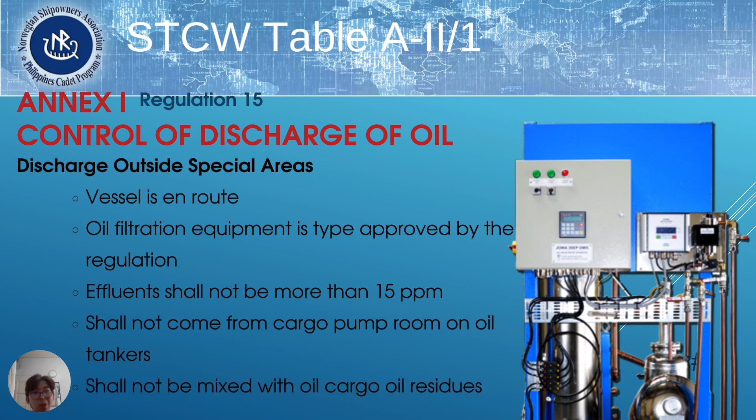And for the last one, no mixing with cargo oil. Water mixed with cargo oil, the oil being transported, cannot be discharged into the sea because it is contaminated by oil. So it has a mix of oil. If you discharge that into the sea, the tendency is it will end up in our ocean.

So next, control of discharge of oil. When discharging inside a special area, it shall comply with the regulations stated above, and there is no discharge of oil in the Antarctic.

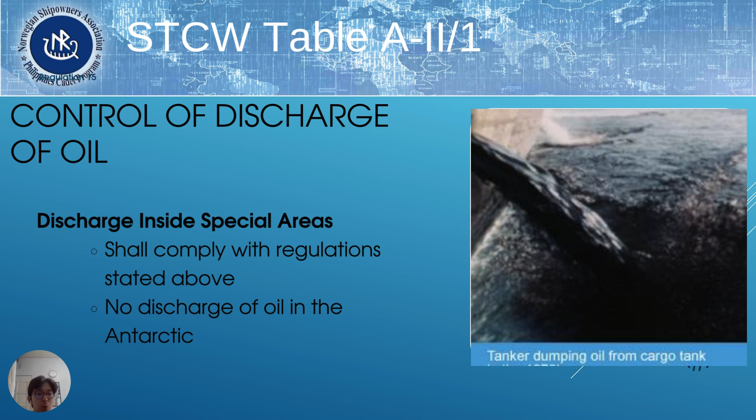And segregation of oil and water ballast. Forepeak tanks, meaning the forward peak tank, which is the forward part tank. For ships delivered after December 31, 1979, no ballast tank shall be carried out on the fuel tank. And if they need to carry large quantities of fuel stored in the ballast tank, it shall be discharged to shore facilities, as I've said.

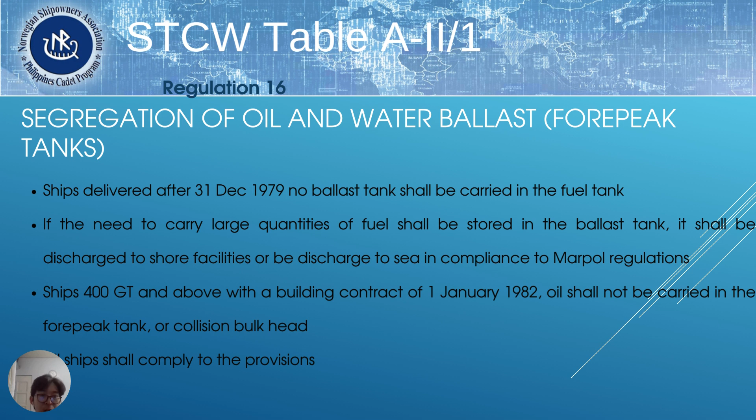Discharge to the sea must comply with the MARPOL regulation. Ships of 400 gross tonnage and above, which is the size of the ship we are referring to, with a building contract from January 1st, 1982, shall not carry oil in the forepeak tank or collision bulkhead. So all ships shall comply with these provisions.

So what are these ballast tanks that we call, and why are ballast tanks taken in the tank? Why do we need the ballast tank? Let's assume that the vessel does not have a ballast system. In such cases, certain conditions may arise. So what is a ballast tank, really?

Ballast tank is a compartment within a ship, inside the vessel, that holds water. Ships use these ballast tanks to take or release water. That's why we call it ballast, because we release and also take in water.

So the ballast tank helps maintain the stability of the vessel and proper draft. The draft is the line at the bottom near the keel, and the depth at which the ship sits on the water, that is the draft.

When a ship is not carrying cargo or needs to adjust the weight, it can fill the ballast tank with water to stay steady. When a ship is loaded with cargo or needs to reduce the weight, it can pump out the water. For example, if your vessel has no cargo but you're going to cross the Atlantic, we know that when the ship is empty, it moves around more.

So in order for a vessel to stand steady on the high seas when crossing the Atlantic, we need to fill the ballast tank with water. That's where we use the ballast tank.

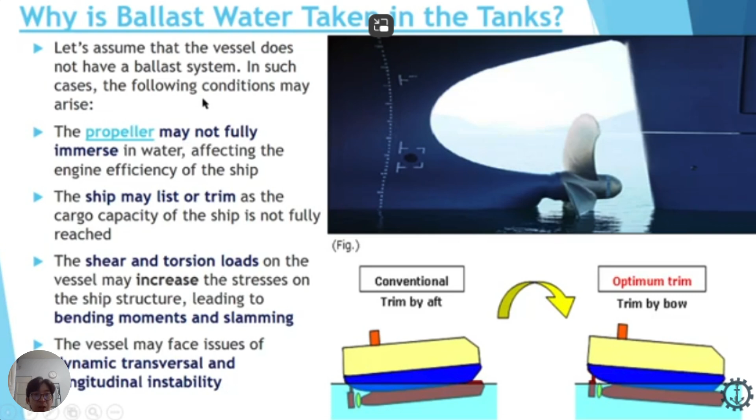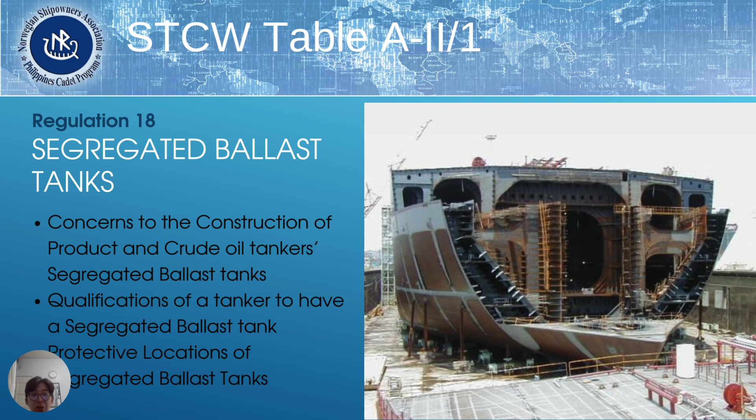And we have also the segregated ballast tank. Its main concern is to the construction of product or crude oil tankers. Segregated ballast tanks qualify a tanker to have protective locations of the segregated ballast tank. So ano ba ang segregated ballast tanks?

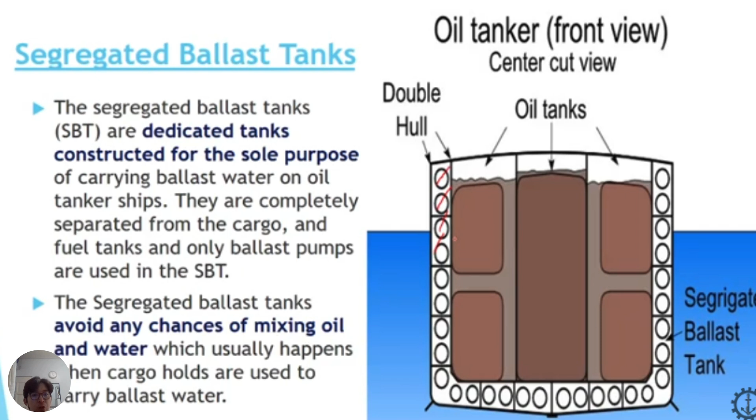Ginagamit natin siya to balance the cargo. So the tanks avoid any chances of mixing of oil and water, which usually happens when cargo holds are used to carry ballast water.

And also, segregated ballast tanks are special ballast tanks on a ship that are only used for holding water or ballast to help balance the ship. These tanks are separated from the parts of the ship where oil or cargo is stored. Nakahiwalay po siya. This is important because it ensures that the water in the ballast tanks never gets mixed with the oil or other cargo.

Kaya from the word itself, segregated. So when the ship releases the water back into the sea, it won't cause pollution since it's just clean. This is especially important for oil tankers to help protect the oceans from oil spill. So that is the purpose of our segregated ballast tanks.

So with regards sa regulation natin, need of the SBT, no? SBT na lang para mas mabilis. Crude carriers of 20,000 tons deadweight and above, product carriers of 30,000 tons deadweight, need capacity of SBTs to operate ballast tanks without having cargo tanks carry the water.

So when weather conditions are so severe that additional water ballast is required to be carried in cargo oil tanks, so in addition, circumstances account for the particular nature of the operation.

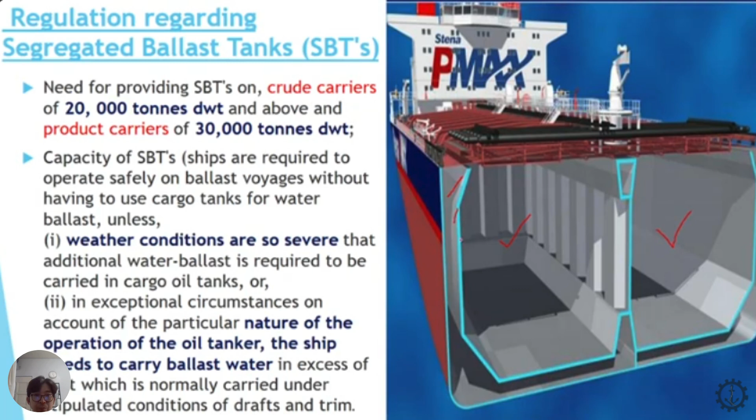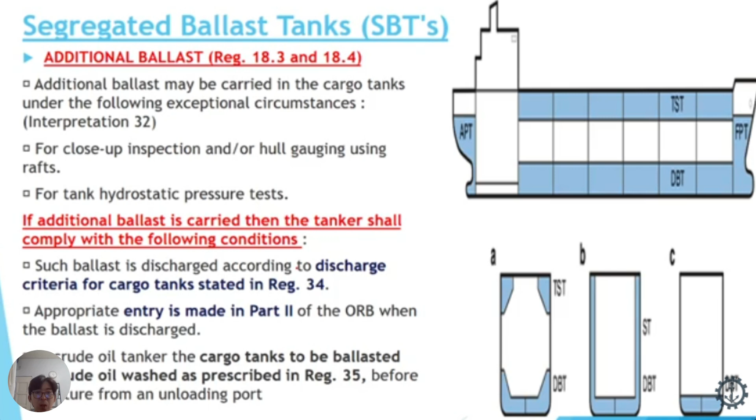So appropriate entry is made in part 2 of the Oil Record Book, ORB, when the ballast is discharged, and crude oil tankers' cargo should be ballasted or crude oil washed as prescribed in Regulation 35 before departure from the unloading port.

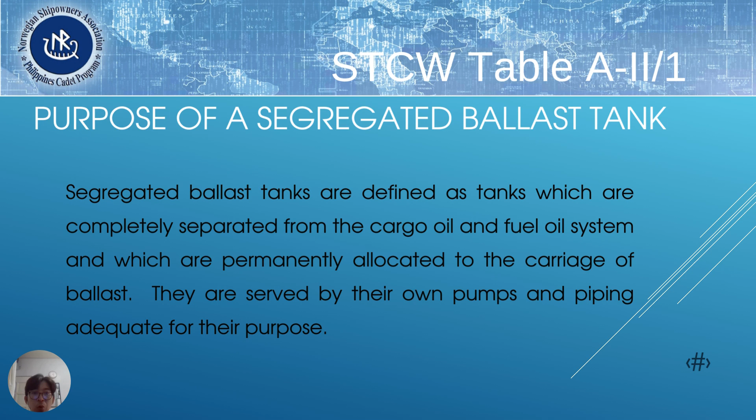So again, the purpose of this is to define as in which we are completely separated from cargo oil and fuel oil. So this system is permanently allocated to the carriage of ballast, and they are also served by the use of own pumps and piping adequate for their purpose.

So kung meron tayong segregated ballast tanks, meron din tayong double hull and double bottom requirements. Pag sinabi nating double hull, ayan yung ayan, tingnan niyo sa picture. Pag sinabing double hull, yung pinaka pader niya, doble. Pag sinabi naman double bottom, yung pinakailalim niya, doble. So before, yung mga construction na vessel, hindi double hull yung mga kinoconstruct na vessel.

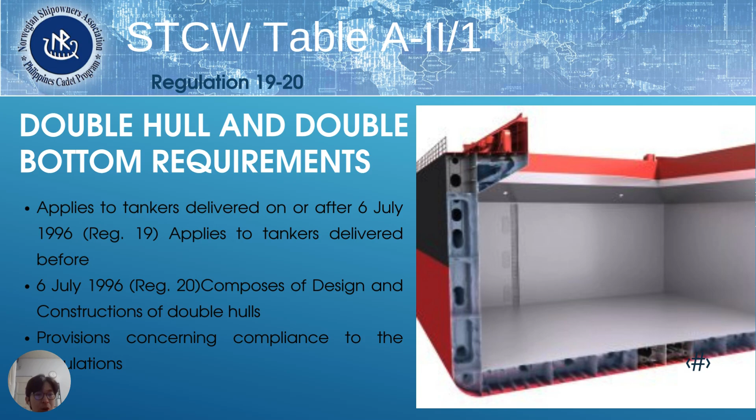So again, it applies to the tankers delivered on or after July 6, 1996. So it composes the design and the constructions of double hull. So doon na implement or doon na simula yung ating double hull requirement. So concerning with the compliance of the regulation, so for example, meron na tayong double hull, meron pa tayong double bottom.

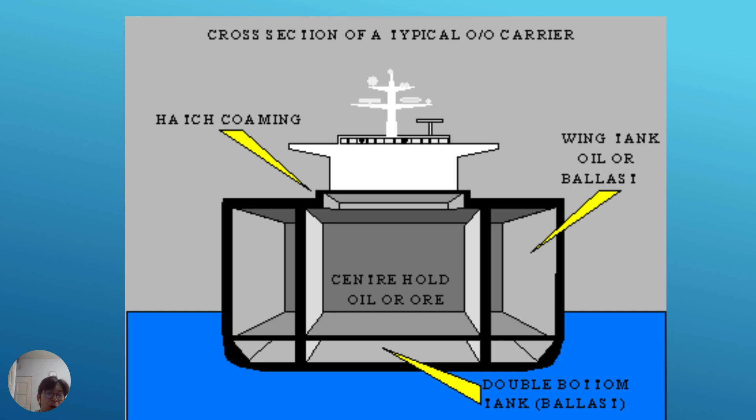So the purpose of this double hull and double bottom: the double hull's ability to prevent or reduce oil spill led to it being standardized for other types of ships, including oil tankers. And also after the Exxon Valdez, in which I've told you before na kaya nagsimula yung MARPOL because of the incident of the Exxon Valdez, the Oil Spill Convention required new oil tankers built for U.S. ports to have a full double hull.

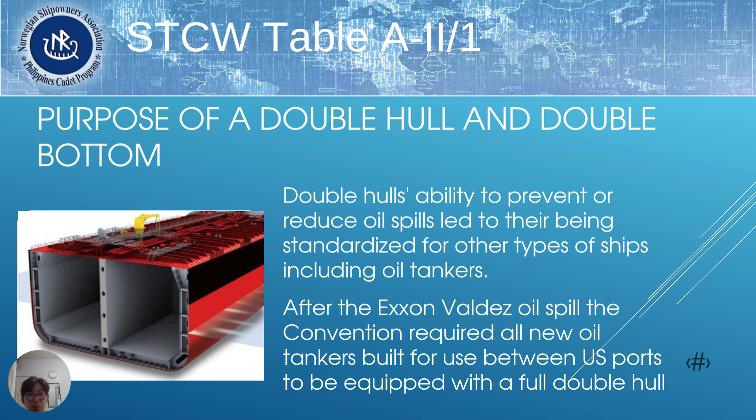So, under Regulation 22, Pump Room Bottom Protection, for ships 5,000 gross tonnage or bigger, built after January 1, 2007. These rules are for large ships of 5,000 GRT or more that were built after this date. So pump rooms must have a double bottom. The pump room where the liquids are moved in or out should have two layers at the bottom for extra safety. This layer helps protect the ship where there is a leak or damage.

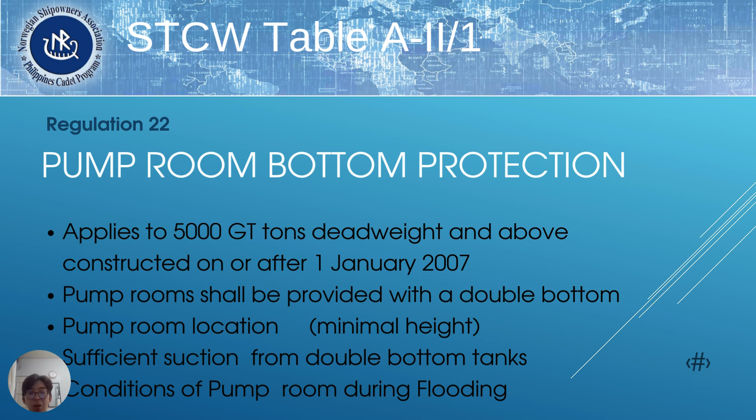And pump room conditions during flooding. If the pump room gets flooded, the design should make sure that the crew and the ship stay as safe as possible. So this includes having safety systems in place to handle flooding situations.

And under Regulation 24, damage assumption. So for our damage assumption, first we have how much oil is in the tanks. So first you should look at how much the oil tanker is carrying in these tanks. This helps to figure out how much oil could spill if the ship is damaged. Then second, types of damage to the ship. Next, you assume the kind of damage that could happen to the ship. This could be from an accident like hitting something, grounding, or crashing into another ship, a collision. So the amount of oil spill depends on how badly the ship is damaged.

And third, where the damage happens. If the ship is damaged near the tank holding oil, oil could be leaked. For some calculations, assume a certain size of hole or crack in the ship's hull, and estimate how much oil could escape into the water. And for the last one, safety design helps reduce oil spill. So ships are designed with special features like double hulls or segregated ballast tanks to help reduce the amount of oil that could leak.

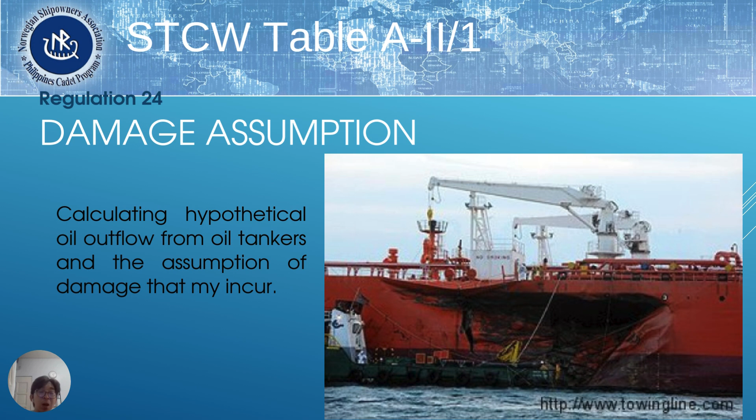And even if there is damage, this could mean that the actual oil outflow could be smaller than the worst case scenario. So by using these ideas, the hypothetical oil outflow gives an estimate of how much oil might spill in a particular accident, which helps the planning for safety and environmental protection. So it's almost the same.

So how to monitor oil discharge and control. In the monitoring system required, all oil tankers 150 gross tonnage or larger must have a system to monitor and control oil discharges. Next, data recording. This system must record important discharge data, which should be stored at least 3 years, and it must be easy to access para mas madali nyo makita.

Standard compliance. Third, the system must meet specific design and safety standards to ensure effective monitoring. And for the last one, proper operation. Crew members must operate the system according to the established guidelines to prevent oil pollution. So to summarize, this Regulation 31 ensures oil tankers have the tools and procedures to safely monitor and control oil discharge, protecting the ocean from pollution. So again, that is yung napapaloob sa Regulation 31.

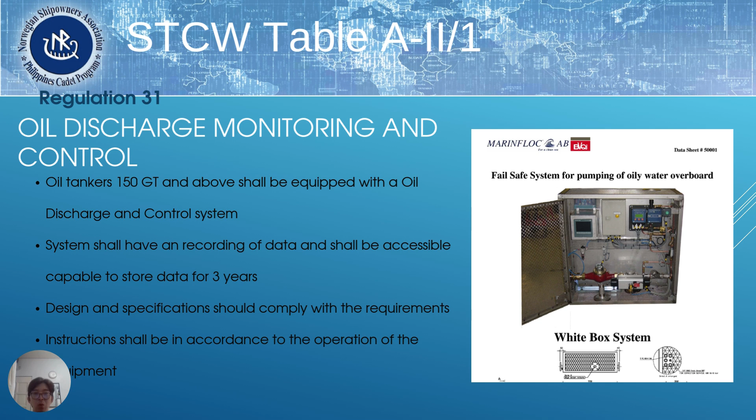So again, before we continue our discussion, you can take a health break. And sa mga gusto mag-breakfast muna, we're going to continue after 10 to 15 minutes. Okay?